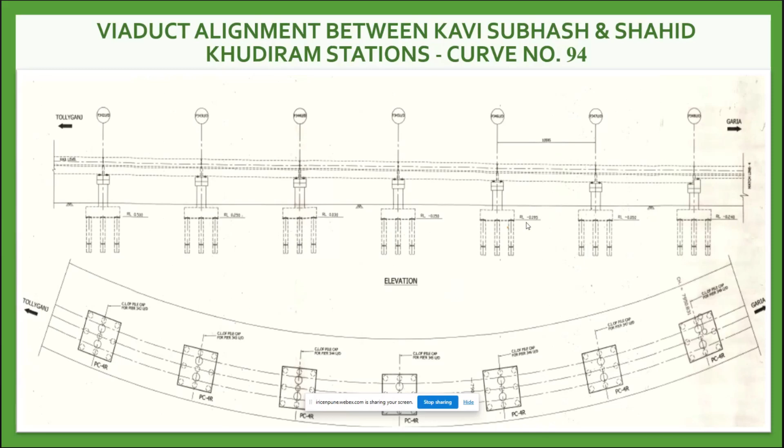My presentation is on checking the girder shifting in Metro Railway Kolkata viaduct portion in sharp curve. In Tollygunge area section, there is a sharp curve and BLT is there. Two years back, in 2023, the girder moved laterally, and it was detected that a kink had formed on the rail. We have explored the cause. It is understood that the temperature that year went up to 57 degrees centigrade.

So our structure: this project started in 1999 and was completed in 2010. The alignment along Tolly Nullah has pile foundation, pile cap, pier head, superstructure of PSC girder, viaduct having a span of around 21.6 meters. Track structure is long welded rail with M1A assembly on BLT plinth.

Viaduct alignment of this section, Kavi Subhash to Shahid Khudiram. That location is around 200 meter radius, 8.75 degree curve, along with a steep gradient of 1 in 80. The superstructure is PSC girder. Two tracks have independent two girders, and the bearing is the elastomeric bearing. Since the girder is a PSC girder, the girder is straight and the curvature alignment is on arc. This particular curve is a long curve, around 500 meter length, and the radius is sharp along with gradient.

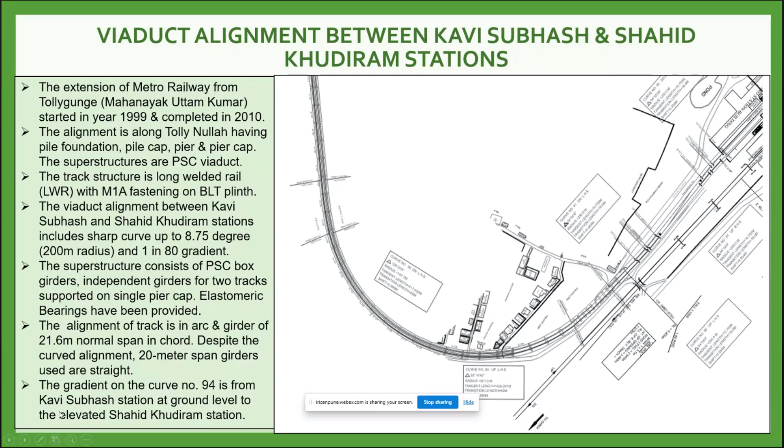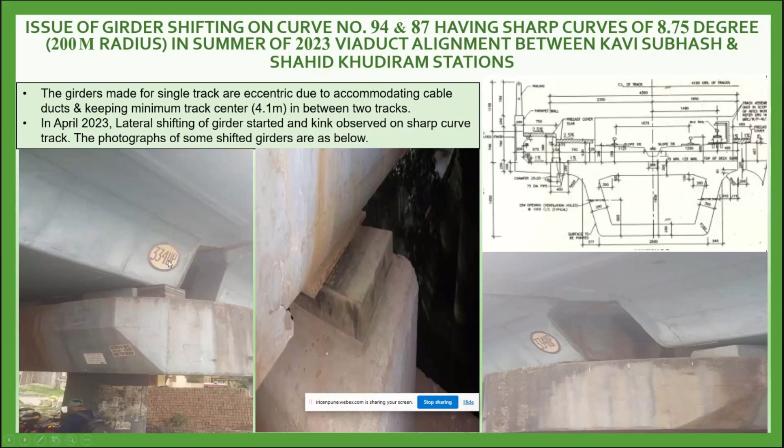In 2023, the temperature of rail rose up to 57 degrees centigrade. Accordingly, lateral girder shifting was seen. Here, up to around 180 mm the girder shifted to the outer side of the curve. This is also shifted. It started in 334 of girder.

We restored alignment by putting two jacks, one vertical for lifting the girder, the second one horizontal, which after lifting, by taking support from the pedestal, pushed it towards the original alignment. To act as a roller, high tensile wires are placed below the vertical jacks. After lifting the girder, horizontal force is applied and the girder is moved as per requirement in the first phase.

This is a photo of this shifting arrangement. Work is done in traffic block. Rail has been defastened, and after restoration, the ERC is inserted again.

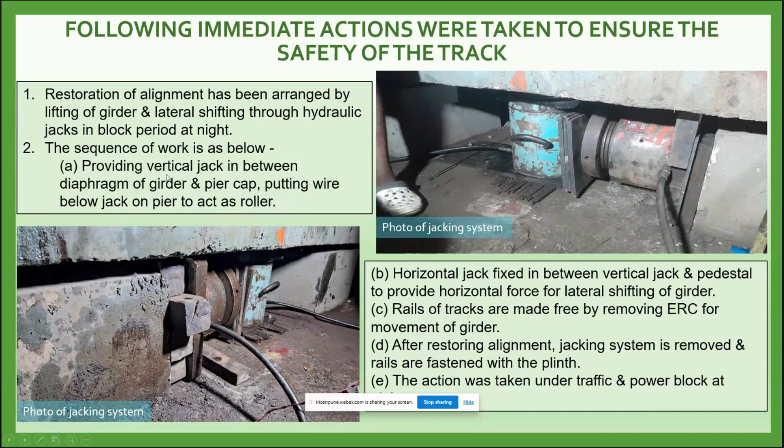Our track fastening is M1A assembly and BLT plinth. The fastening is very old and has less rigidity with respect to present fastening systems like Vossloh, Pandrol or Delkor. We are proposing to replace this fastening system with a modern type fastening system, because one of the reasons of shifting is also the fastening system.

In this fastening system, due to sharp curvature, sometimes bolts are sheared and the fastening becomes not so rigid. Due to loose fastening, the track system vibrates more. It enhances the movement of the girder. So both are combined. Due to vibration of track, the girder also moves slightly.

Main reasons of lateral shifting are eccentric dead load of girder due to cable duct and resulting force towards the outer side of the curve, where the shifting of the girder is mainly observed. Old fastening system having lesser fastening force, with frequent movement of the ERCs and breaking of anchor bolts observed at that location. Additional vibration of track during train movement due to sharp curve and poor fastening system is also a reason.

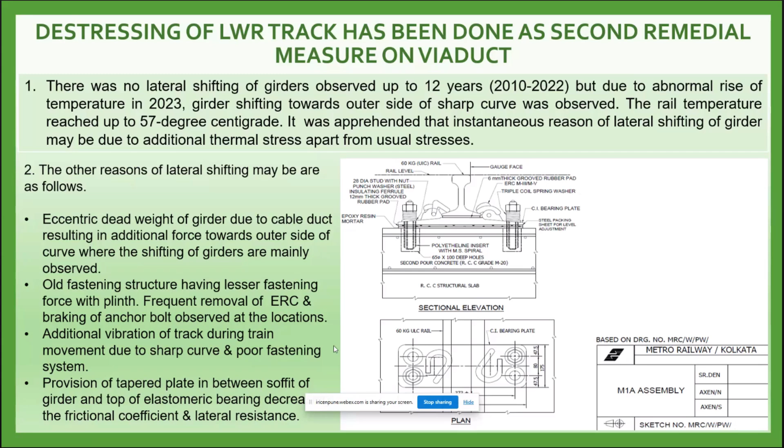Provision of tapered plate in between soffit of the girder and top of the elastomeric bearing decreases the friction coefficient. So if friction resisting force is less, the girder will move if lateral force increases due to various reasons: traction, superelevation, and thermal stresses.

First we de-stressed the track. Then we provided a restrainer along the diaphragm wall of the girder, so its movement can be resisted. So in 2024 we provided the restrainer like this. It is designed by RITES and provided to take lateral load induced due to superelevation and traction force, including thermal stresses. A sketch of this, both sides.

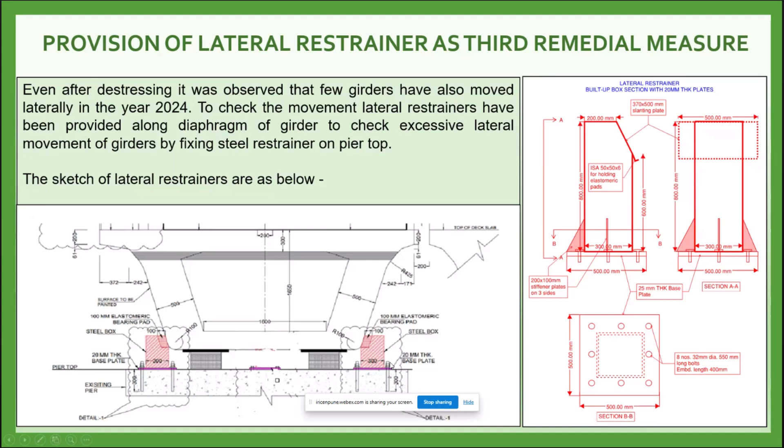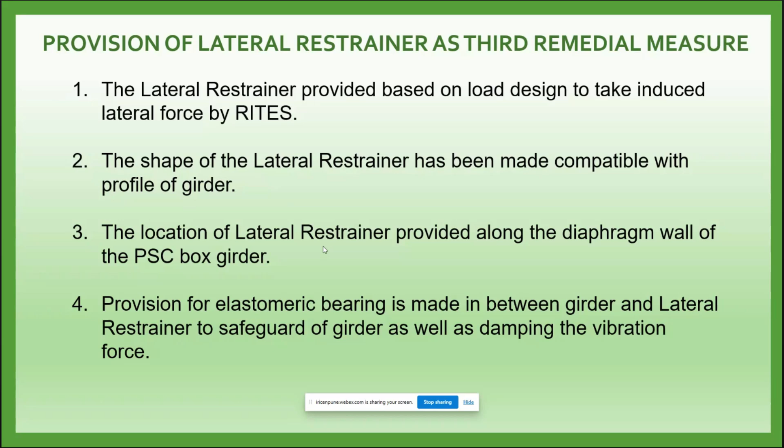The lateral restrainer is provided based on the load design to take induced lateral force by RITES. The shape of the lateral restrainer has been made compatible with the profile of the girder. The lateral restrainer is located along the diaphragm wall of the PSC girder. Elastomeric bearing is provided in between girder and lateral restrainer to safeguard the girder, as well as damping of the vibration force induced during movement of train.

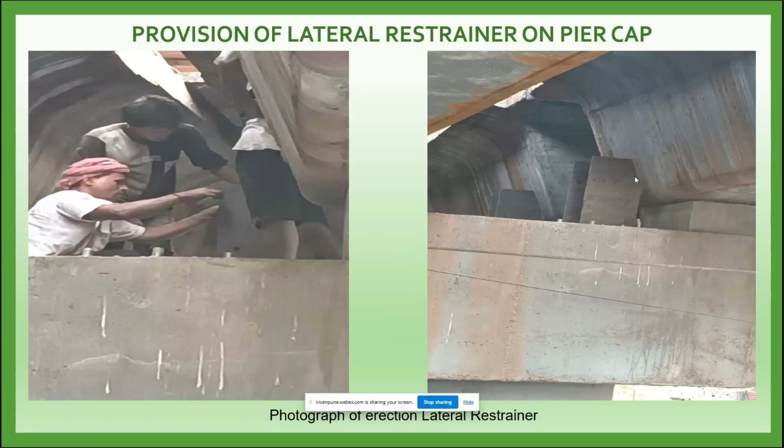This is the method of construction of the lateral restrainer on the pier. The base plate is provided of 32 millimeter thickness, and it is fastened with high tensile strength 8.8 grade anchor bolts, 12 numbers of 20 mm dia. This is constructed.

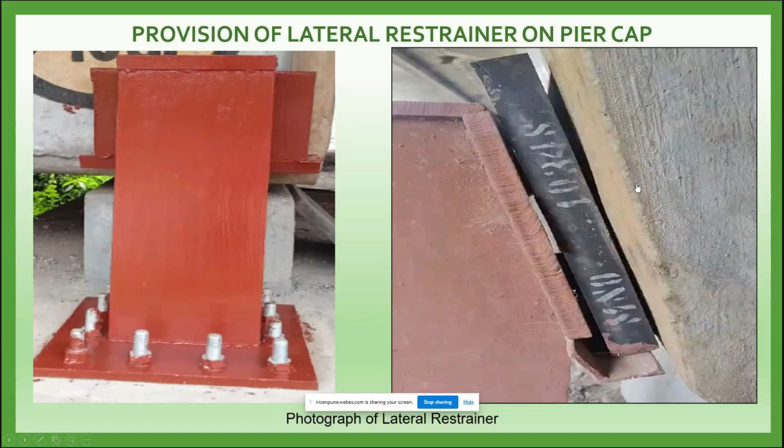This is the lateral restrainer, and this is the bearing plate provided in between the girder and lateral restrainer. The profile is almost parallel with the diaphragm wall or girder, so that this bearing can be provided. If the girder moves, it will brace this bearing, and the bearing rubber will reduce damage to the girder. Its location is along the diaphragm wall, so that it can take the load.

The load has been calculated; we have discussed with different organizations like ETUDE, RITES. We have also approached IRICEN regarding this one, and it reveals that the force induced due to various traction and thermal stress is well below the maximum permissible limit. So it was clear that the main reason of movement is not the thermal force. It is some offloading or something.

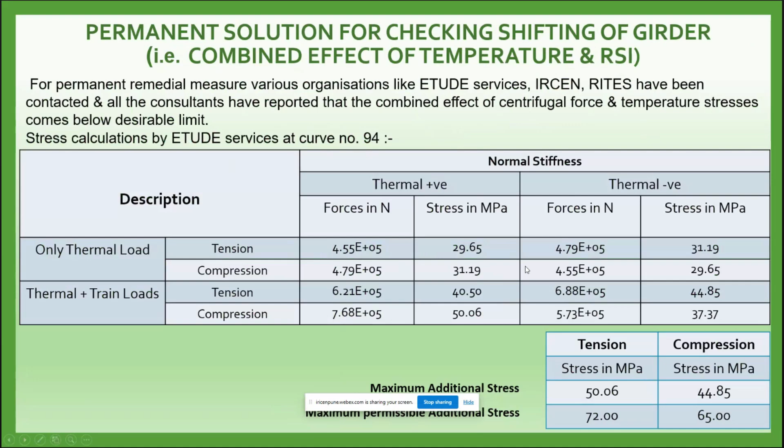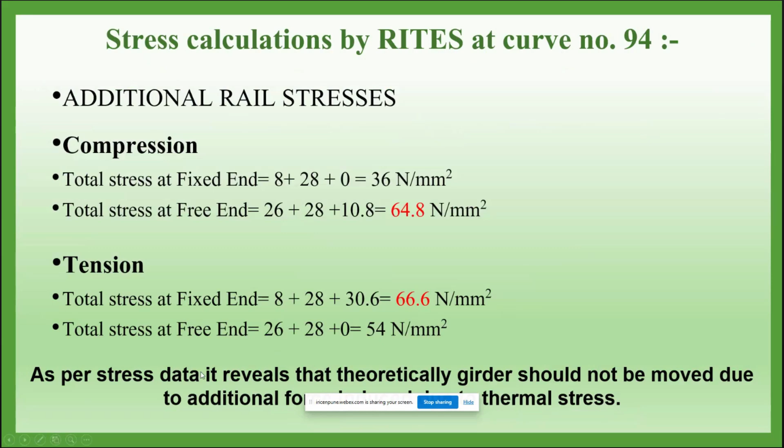From the above deliberation, the exact reason of the lateral shifting of the girder is not clear, though temporary measures have been taken and are giving satisfactory results. The temporary measure requires continuous observation to avoid additional stress on the girder and pier head. Prima facie, it is seen that the friction force developed between the soffit of the girder and top of the bearing is less than the combined force generated during the movement, resulting in shifting of the girder.

Since the weight of the girder including accessories is more than 500 metric ton, the vertical load on each bearing of the girder should be 125 metric ton. It is apprehended that the load on each bearing is not coming equally due to rigidity of the RCC box girder. If the vertical load decreases, the lateral resisting force P equal to mu R will be less than the induced force, and then the girder will move.

In case of LWR laid on viaducts or bridges on BLT, the induced stress due to traction and thermal stress is locked between the two fastening systems, and the scope of elongation of rail is eliminated. However, if the span of a bridge becomes more than the limit, deflection of the structure becomes appreciable and LWR will not be permitted.

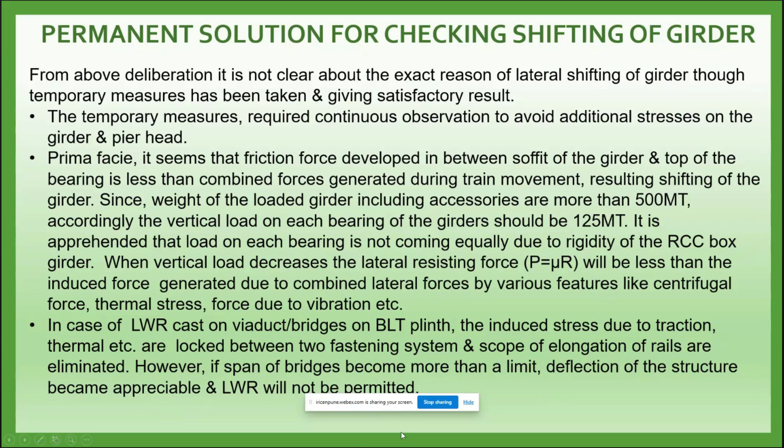After providing the lateral restrainer along with re-equipping sheared anchor bolts and proper tightening of the anchor bolts, further movement of the girder has been stopped at that location. However, at a new location, further shifting was detected in year 2025 on a sharp curve, pier number 330 on curve 94. The following action is proposed for stopping lateral movement of the girder.

Provision of lateral restrainers at curves sharper than 6 degree. Provision of updated BLT track fittings as per RDSO performance criteria. Elastomeric bearings to be changed where they have become old and lost their friction coefficient.

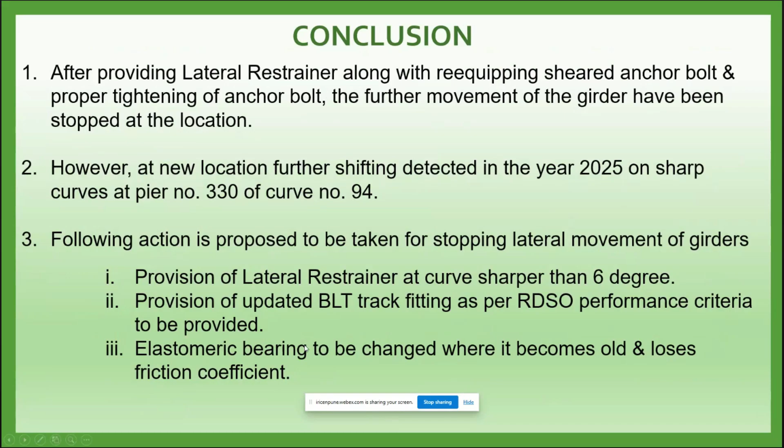Thank you, Mr. C.P. Singh. छोटा सा हाँ नहीं है आपका presentation.

Definitely it was very short and sweet, but you have given a light of hope for the problem being faced by various metro railways, where they are finding difficulties in continuation of LWR due to lateral shifting of girders. So of course it is an obvious solution that in order to prevent the lateral shifting you have

to provide some restrainer. But the thing is, it should have been thought of at the very beginning, but maybe when this metro was provided or the bridge was made, the LWR concept was not very clear, so it might not have been included.

However, what you had thought, that because of the one-sided additional cantilever portion to house the cable, etc., definitely makes an eccentric loading, and that could be one of the contributions. Yeah, that could be one of the contributions. And when the train is moving on a sharper curve, the excessive centrifugal force, and then because of the movement, loading, unloading, a sort of vibratory action will take place, and that may loosen the frictional grip of the elastomeric bearing.